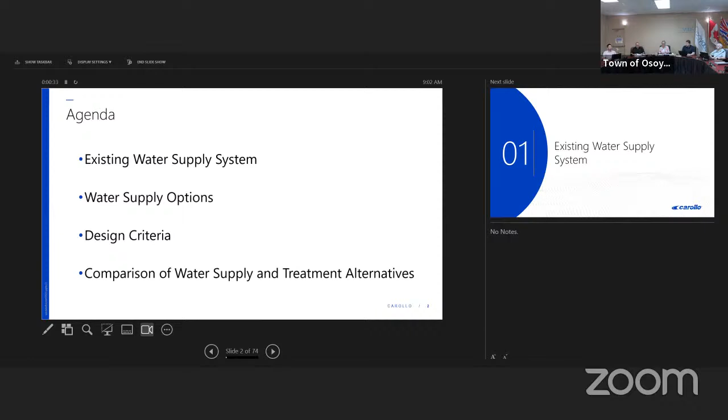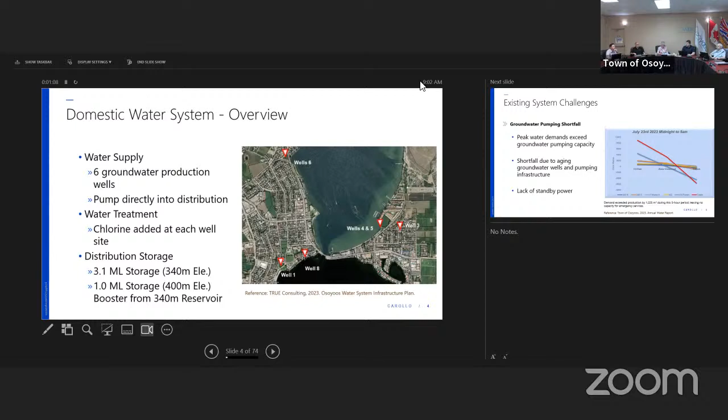So the existing system relies on domestic groundwater wells. There's approximately 6 production wells in service. The groundwater supplies have served the town very well, historically. It's a groundwater supply network with multiple wells pumping into a common network directly into the distribution system. The system relies exclusively on chlorine for treatment, and there are distribution reservoirs on the east-west side of the system to balance peak demands and fire flow.

Some of the challenges encountered with the existing system: on groundwater well pumping capacity, there's a shortfall in peak consumption in relation to the current pumping capacity. Some of that's related to aging infrastructure within the groundwater well systems and limited pumping capacity, as well as a need for additional groundwater extraction points and wells going forward. Another consideration on the pumping shortfall is the lack of standby power within the groundwater pumping system.

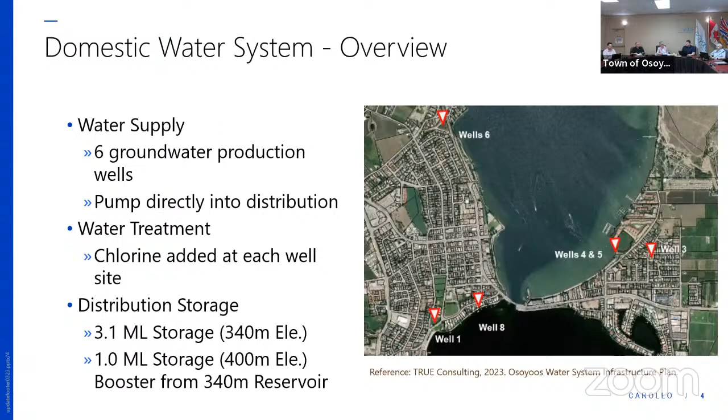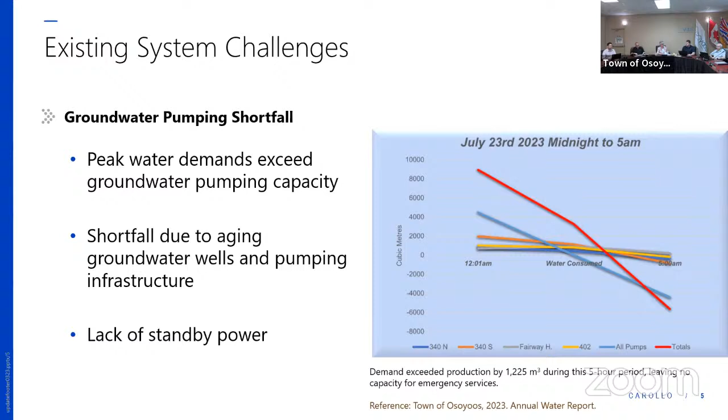I think compounded with the shortfall in the current pumping capacity, just being slightly below the peak consumption rate, which is presently mitigated with reservoir storage, there's also a lack of standby power. So if there were power failures, either locally or more broadly within the system, there could be an incident of not having enough water to meet demand and fill the reservoirs.

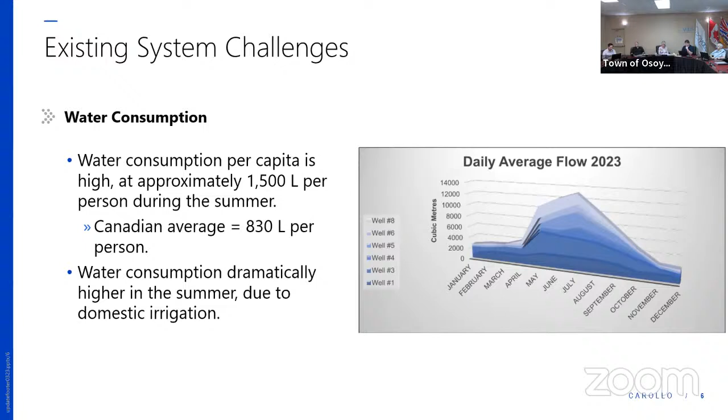Another context within the existing water system challenges, this one's less related to the source and more related to consumption patterns within the community: relatively high per capita consumption. Looking at other communities within the Okanagan, typically seeing anywhere from 500 to 1,000 liters per capita per day on average, with town of Osoyoos being quite a bit higher. That's a consideration continuing to challenge the capacity of the groundwater system you have in place, and that's consistent with other communities within the valley. It's very much driven by domestic irrigation, so seeing a very high swing from seasonal winter demands to peak summer demands, combined with irrigation as well as tourism and hospitality service.

So that's the current situation. Looking forward, if the town were to continue using groundwater as the primary supply source, additional well capacity would be required. Testing wells were developed for well 9 and well 10 previously, and additional wells would be needed to meet the 2050 demand. We looked at 2 different scenarios documented in previous studies with respect to a 2050 design horizon, one with conservation, one without conservation, and a 1% to 3% range of potential population growth. For analysis and planning purposes at this stage, comparing the 2 options, we selected the midpoint growth scenario, and assumed that conservation was not included in that number.

The rationale around that is from a planning and siting perspective, and trying to make big decisions on major infrastructure. Not knowing what you're going to get out of conservation, I think some of the targets that have been proposed may not be achievable over time. So it'd be prudent to consider, from a planning perspective, sizing without conservation, and then be able to stage that back as you look at whichever solution goes forward, having that provision to stage in response to what you're able to achieve through conservation.

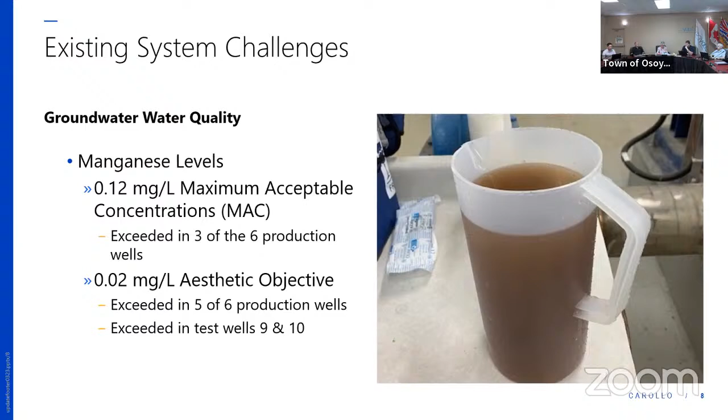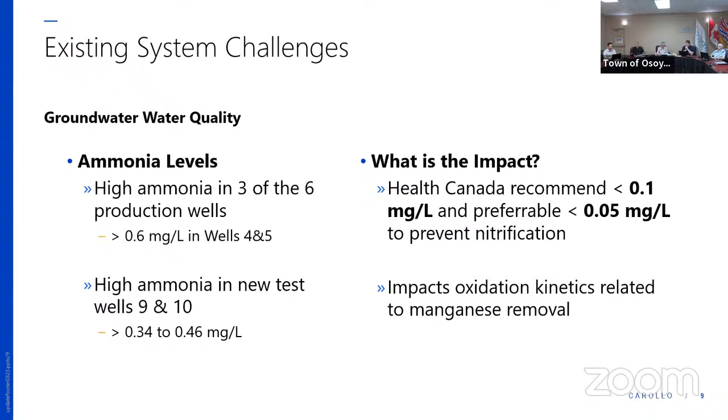For the groundwater supply, there are relatively high levels of organics. The recommended organic level is 4 milligrams per liter total organic carbon. That's largely driven by the potential for disinfection byproduct formation—carcinogenic byproducts that form through the interaction of chlorine and those organic compounds. In wells 1, 3, 4, 5, and 8, that guideline of 4 milligrams per liter is exceeded going in. The town, historically, in operating chlorine disinfection at the different well sites, has had to work fairly closely to manage that chlorine residual in relation to trying to avoid generating high disinfection byproducts. So it introduces a challenge within the disinfection process and potential health considerations around disinfection byproduct formation.

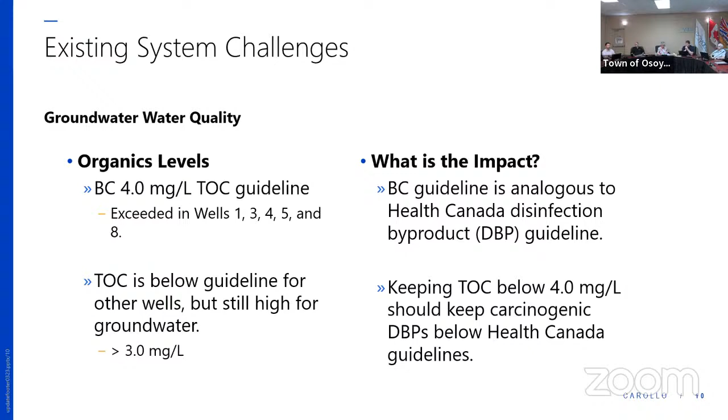Looking at the groundwater wells in relation to these different water quality parameters, it's helpful to see the incidence based on location. Well 1 has relatively low manganese concentration, low ammonia, however high organics content. Well 3 exceeds the manganese aesthetic objectives, is below the ammonia level, but exceeds the total organic carbon levels. Wells 4 and 5 exceed both the manganese maximum acceptable concentration levels, as well as the recommended ammonia level and organic carbon levels. Well 6 exceeds the manganese aesthetic objectives, but is below the ammonia and organic carbon levels. Finally, well 8 exceeds both the manganese maximum acceptable concentrations, the ammonia recommended limits, and total organic carbon levels exceeding 4 milligrams per liter.

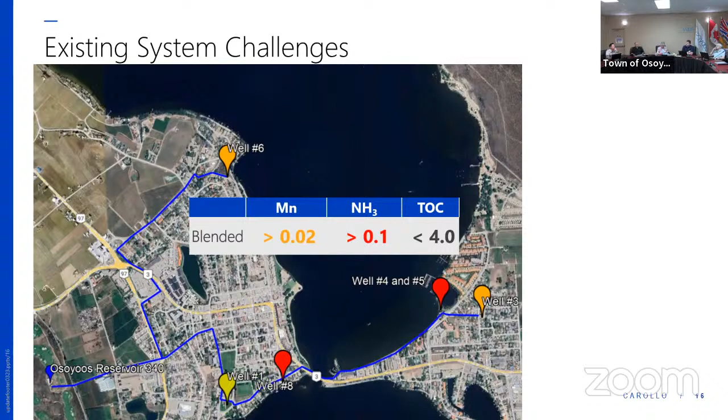So the blended water quality, if we pulled all that together and mixed into a common source supply, the manganese would be between the aesthetic objective and the maximum acceptable concentration. Ammonia levels would exceed the recommended guideline of 0.1 milligram per liter, and your organic carbon would be just below 4.0 milligrams per liter.

Looking at the groundwater supply, another important consideration is the recent groundwater at-risk of containing pathogens criteria, which is relatively new—it replaced the GUDI guidelines. These are effectively an assessment or screening tool to understand the vulnerability of a groundwater well supply to interaction with pathogens, looking at different exposure potential to surface water contaminants and ground-to-surface contaminants. So if you had a standby generator over top of your groundwater well, that would be a potential source of petroleum into the groundwater supply. It also looks at wellhead construction and the potential for surface interaction to infiltrate. Looking at the town's aquifers and speaking with Western Water Associates, there are effectively two aquifers identified, one on the east and one on the south side. They're essentially similar—identified separately, but more or less with the same characteristics. They're shallow aquifers, heavily influenced by surface water, with direct influence from the lake as well as direct influence from surface water activity, so ground filtration from irrigation interacts with your groundwater supply.

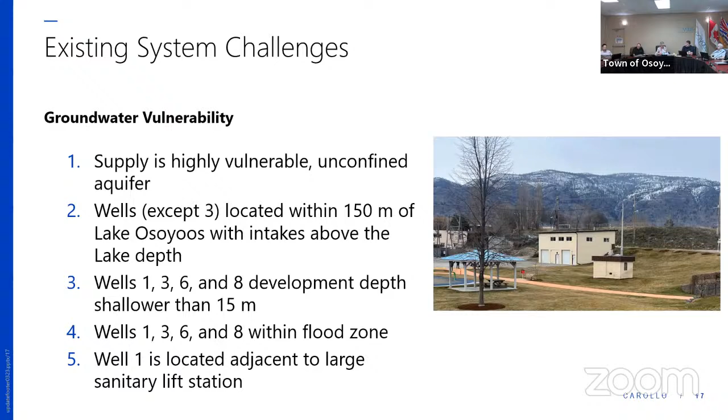So in summary, regardless of whether we continue down the path of using the groundwater supply system, at a minimum, utilization of two forms of disinfection will be required—that would include UV disinfection and chlorination—and that would be required at all well sites, or at a common location that all the wells are supplied into.

So in summary, with your existing system, from a source supply perspective, additional pumping capacity is required to extract more water to meet both current demand as well as future demands.

The aquifer is considered a shallow, unconfined, highly vulnerable aquifer to surface water contaminant interactions. There's also a direct relation - high organics in the groundwater are an indication of that influence and interaction with the surface water source at Osoyoos.

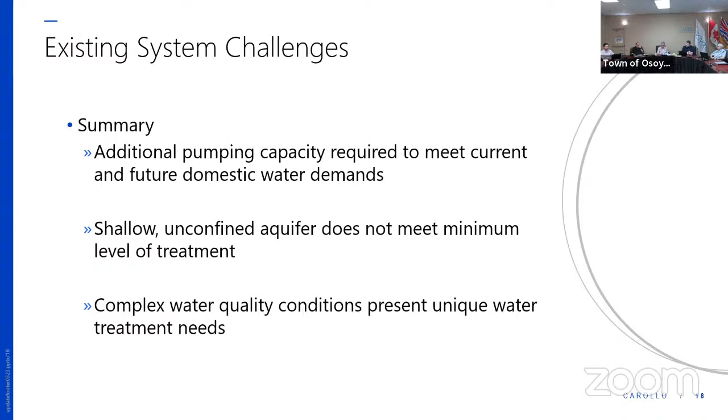And then finally, there are relatively complex water quality conditions for treating the different parameters independently, and we'll get into that a little more when we look at the pilot data that was conducted both in 2017 and more recently in 2023, 2024.

The conclusion: upgrades are required. The drinking water infrastructure needs both expanding supply capacity as well as providing additional levels of treatment to meet both provincial and federal health guidelines.

The town is fortunate to benefit from having access to two relatively good source waters. You have the groundwater source available that has served you well leading up till now, and then availability of a relatively high quality surface water source as well in Osoyoos Lake.

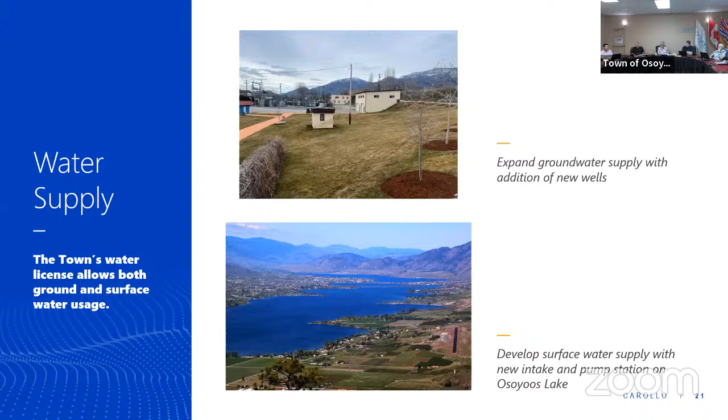And so in looking forward, in consideration of making significant capital planning for the town, it makes sense to decide what is the best source to invest in going forward. That effectively formed the basis of this study, which was to evaluate the feasibility of both supply and treatment considerations for the town, given the challenges with the existing system.

So looking at the groundwater supply, some considerations from the analysis: minimum level of treatment would be two forms of disinfection - typically UV disinfection followed by chlorine disinfection.

Complex inorganics, metal and ammonia concentrations have interaction with the treatment kinetics and chemistry that introduce some challenges that need to be considered. We've also identified...

...perfluorinated substances, PFAS, otherwise known as 'forever chemicals,' have been identified and confirmed within the sample. They have not exceeded current guidelines, but are of note, certainly from the groundwater supply, in that they have a long residence time and often stay around for many years.

On the raw water supply, to meet the 32 megaliter per day planning capacity at the 2050 design target, 5 new wells would be needed to meet that production capacity.

Of the existing wells, many have been serving the town well for many years. As a consequence, they're getting due for refurbishment, to get another 50-60 years out of them and to increase the capacity of the wells to meet demand needs.

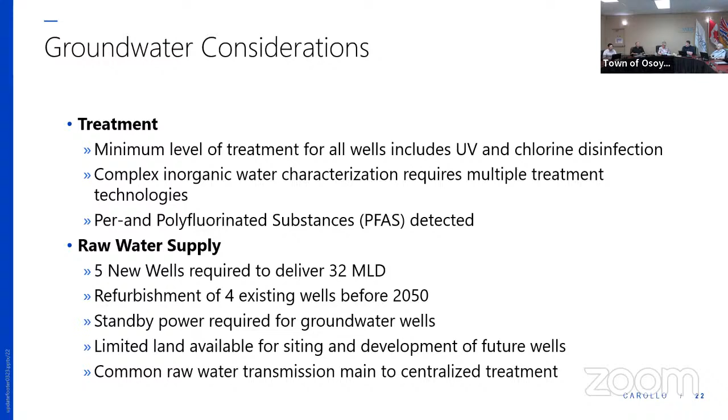Looking at the surface water treatment plant, the lake is characterized as relatively low turbidity, moderate organic level, with seasonal algae events that need to be considered within a treatment selection process.

The surface water is relatively typical and similar to several of the surface water treatment plants throughout the valley. Also of note, PFAS was detected in most recent sampling. The results haven't been confirmed, but are below current guidelines - something to track and keep an eye on.

With raw water supply, for the domestic source, there is no domestic raw water supply infrastructure from the lake, so that would need to be new infrastructure to get water from an acceptable location in Osoyoos Lake into a centralized treatment, similar to groundwater, and then into the distribution system. At a high level, irrigation intake 8 was identified as a suitable location for further investigation or development of that source water supply.

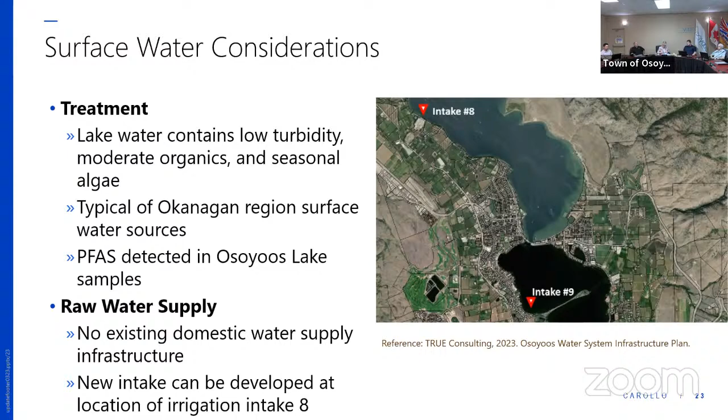So the design criteria, I'll walk through. This sets the framework for the analysis of the two options and considerations that went into development of those options. From a water quality perspective, both options follow through on the 4-3-2-1-0 guidelines, which are both federal and provincial guidelines for protection of pathogens, following a multi-barrier approach.

The differences between the two systems: relevant to groundwater, there's a target for ammonia reduction to manage treatment process stability, manganese reduction, and metals reduction. On the surface water side, consideration to potential algae events and associated cyanotoxins needs to be considered. There's both the cyanotoxin, which is a health consideration, and the geosmin and MIB, which are related to taste and odor events that trace back to algae.

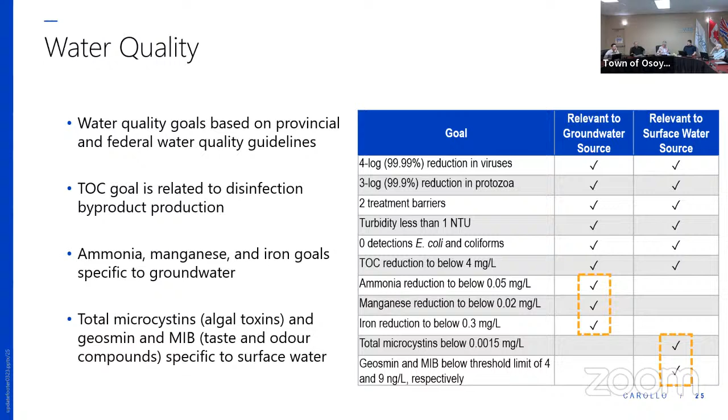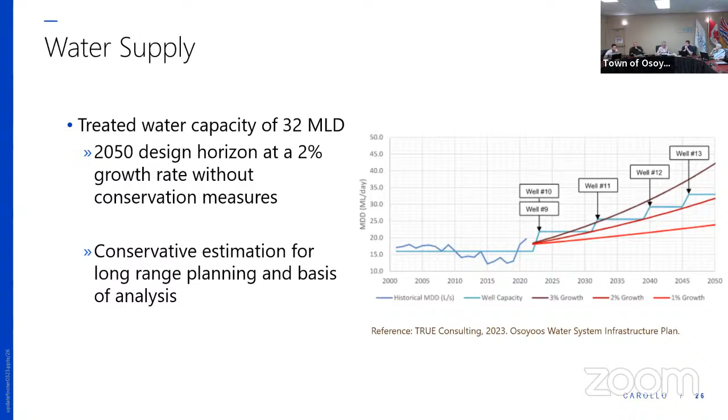As far as water supply, as mentioned previously, for the basis of planning comparison of the two options, we selected the 2050 design horizon and 32 megaliters per day of treated water. That assumes anything gained out of conservation measures will be a benefit. So from a planning perspective and looking at further development of the source water supplies, selecting that 32 megaliters per day is a reasonable and conservative assumption for planning purposes.

As far as equipment configuration, this drives some of the decision making on the layout and orientation of the process infrastructure within the proposed treatment and raw water supply components. As per the current BC Building Code, water infrastructure is to be built to post-disaster requirements, which introduces more complexity in the structural design and construction of the facilities to handle seismic events. Targeting zero boil water notices due to treatment upsets establishes a certain level of redundancy within the process design to accommodate intermittent upsets, and then continuous supply of potable water.

So treatment train - multiple treatment trains, having the ability for residual treatment not to impact the production of treated water. And similarly across all systems, having standby power both right from source water through to treatment plant, so that in the event of fires or other potential events that can impact your power supply, you're still able to produce water and get it into the system.

From a siting perspective for a new facility, it's important to plan for potential changes in your demand and potential changes in your water quality. Selecting a site that can accommodate different future considerations is recommended at this stage. That informed our approach to identifying a proposed site for that centralized treatment.

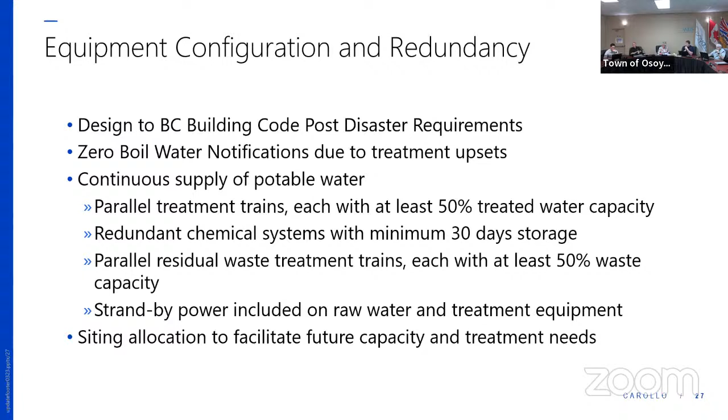Within that, we identified biofiltration, which is a common tool used for manganese removal, catalytic manganese removal, which speaks more to proprietary media technology - so manganese greensand, greensand plus manganese dioxide, and other types of proprietary media that target those metal removals. And then organic absorption, looking again to reduce organics levels as well as potentially deal with PFAS. And then, as mentioned, the base of two stages of disinfection following the treatment.

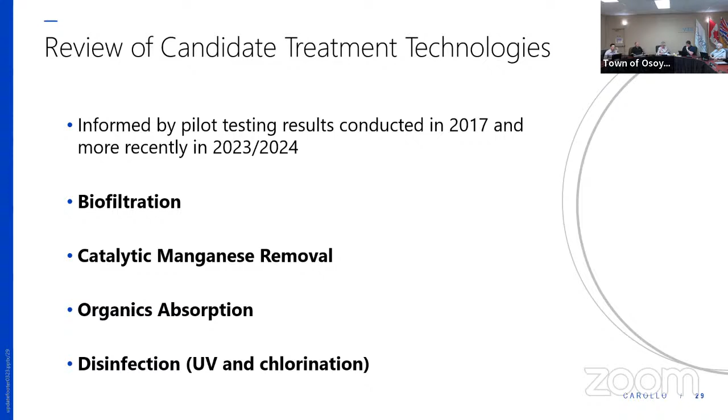Looking at the results of the pilot testing - I understand you've received a more detailed presentation on this, so we'll just highlight the considerations that informed selection of the treatment process for the groundwater supply in this feasibility assessment. They looked at three different treatment types: greensand and Filox, which are effectively the catalytic manganese removal, biofiltration, as well as ion exchange. Each technology was able to treat one of the parameters encountered within the groundwater supply, but none of them were able to deal with all of them at the same time - so there wasn't a silver bullet within the quiver from the pilot testing results.

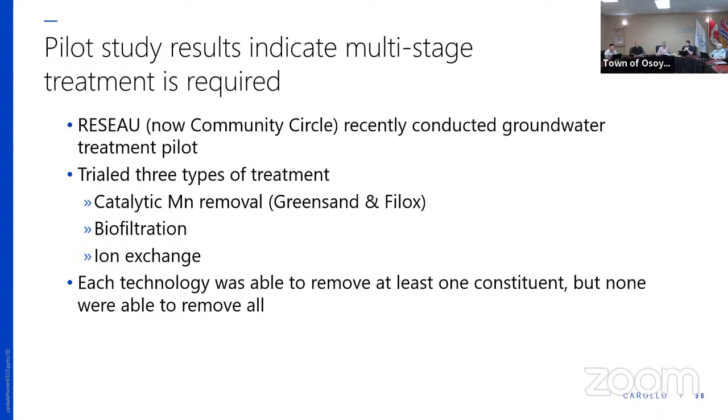Looking at the ammonia removal, it's probably harder to see, but the light green and murky green dots show the green sand treatment train, which would be coupled with chlorine addition. Early in the piloting, you see a reduction below the target for ammonia with the green sand, a lot of that driven by the chlorine addition, and then it starts to veer off and rise back up over the course of piloting.

Looking at the manganese levels, the green sand was able to remove manganese early on for about half the piloting period, but then started to climb up again, showing some breakthrough and sloughing of manganese as it continues to operate. Again, this presents some concerns with the stability of manganese removal from that technology.

Looking at ion exchange, it was really the only technology able to effectively reduce the organics consistently below 4 milligrams per liter. Turbidity, which is less of a target and more of an indicator of particulate removal and protection from pathogens, showed effective removal in both the biofilter and the green sand and Filox treatment technologies.

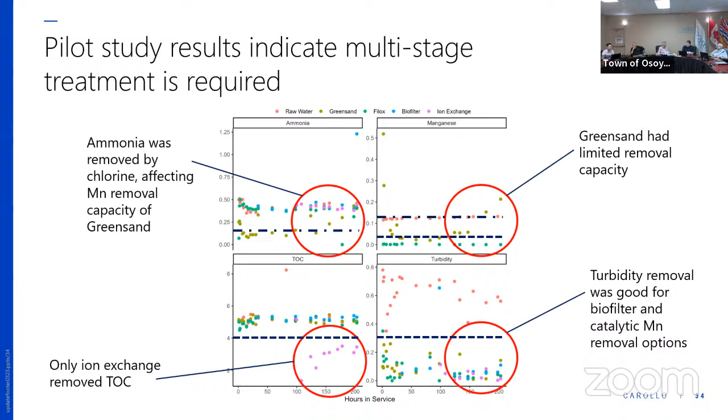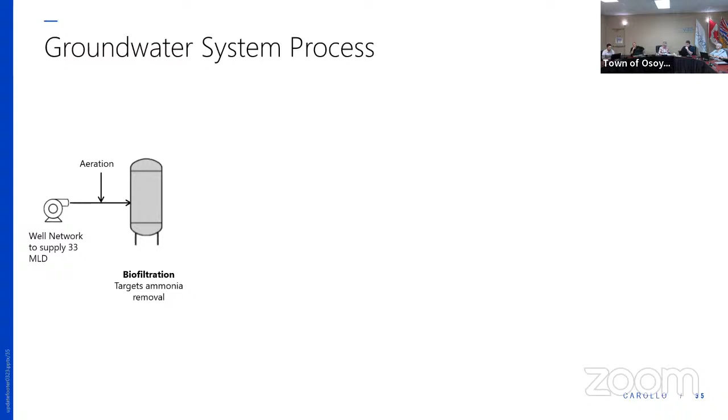Based on analysis of the piloting data, as well as industry practice and what you can reasonably achieve through these different technologies, we identified that biofiltration for removal of ammonia should be able to effectively remove it, with the addition of aeration to improve the health of the biological activity on the filter media. It will have some benefit to organics reduction as well as manganese removal, but maybe not consistent or stable enough to be relied on its own.

So we propose following the biofiltration with a manganese dioxide contactor, which would then effectively polish or scrub any potential manganese that makes it through the biofilter. It would be caught by the manganese dioxide filter and removed, effectively preventing any dark water events or seasonal breakthroughs.

The other thing that came from the piloting data was an indication of the stability of the biofilter to maintain treatment efficacy through ranges of flow variations. When you have a seasonal flow like the town has, biological filters stabilize over the course of days, sometimes 30 days, so ramping up and down can be challenging for them. Again, the manganese dioxide contactor helps catch some of that breakthrough that occurs through stabilization of the biofilter.

We identified optionally a GAC, or granular activated carbon media, that would effectively remove any organics present in the system and reduce disinfection byproduct formation, but also focus on potential other contaminants like PFAS, which is becoming more of a consideration and concern. And then, as mentioned previously, the inline UV reactor followed by chlorine disinfection.

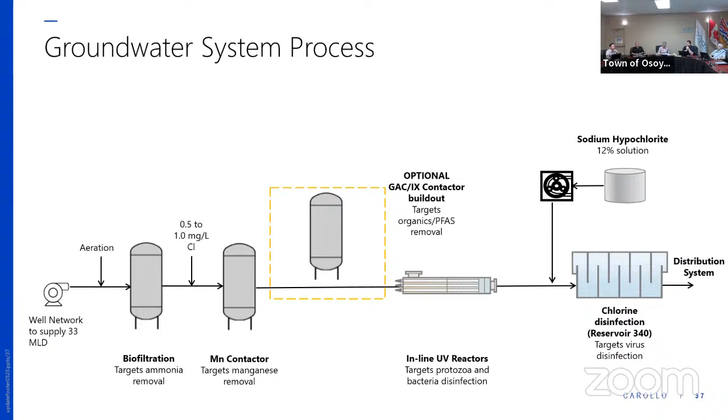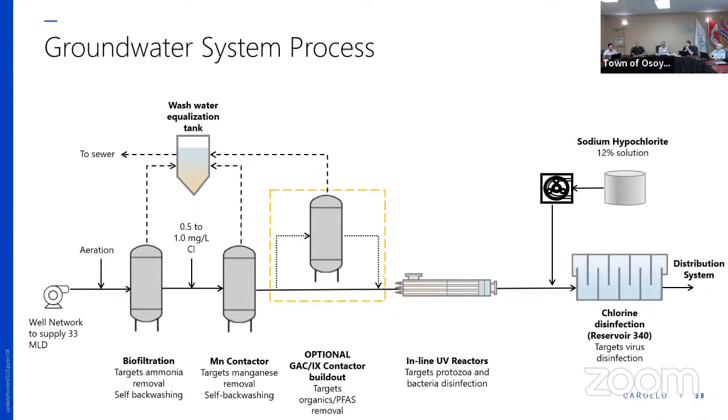On the final treatment consideration for the groundwater supply, wash water equalization is relatively easy to manage in the sense that these biofilters or pressure filters will backwash automatically, for short duration, a few times a day to maintain the health of the filter. That's equalized in a tank and then can be discharged directly to sewer. There's a hydraulic impact to the capacity of the wastewater collection and treatment system, but from a quality perspective, we didn't identify any parameters of concern going into the waste stream.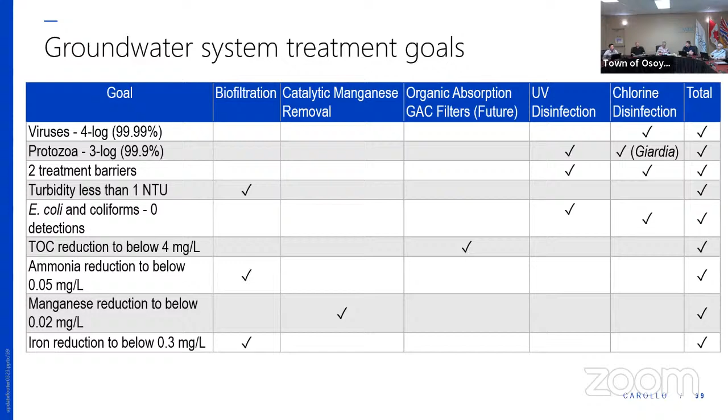Just a summary slide showing the ability of this treatment train to meet all of the targets, pathogen guidelines and treatment objectives, and which technology aligns with which parameter.

Just a brief comparison to previous considerations on groundwater supply planning. The basis of design was approximately 20 megalitres per day, so we're looking at 50% higher capacity for planning purposes, and I think it was supposed to focus on manganese removal. It looked at aeration and the biofilter, which the pilot testing more recently showed challenges with being able to get that stability. So the expectations of this treatment train, based on the piloting data, would see incidents of manganese breakthrough, and the challenges around ammonia and manganese removal hadn't been fully developed or considered within this treatment approach. It also didn't consider the two stages of disinfection.

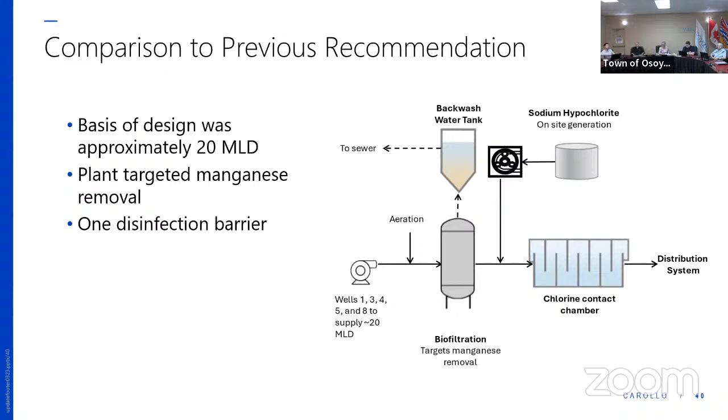So again, proposed groundwater plant layout, approximately 1,600 square meter footprint. These are conceptual level layouts, with lots of opportunity to refine and configure this going forward, but we wanted to develop general footprints for comparative purposes.

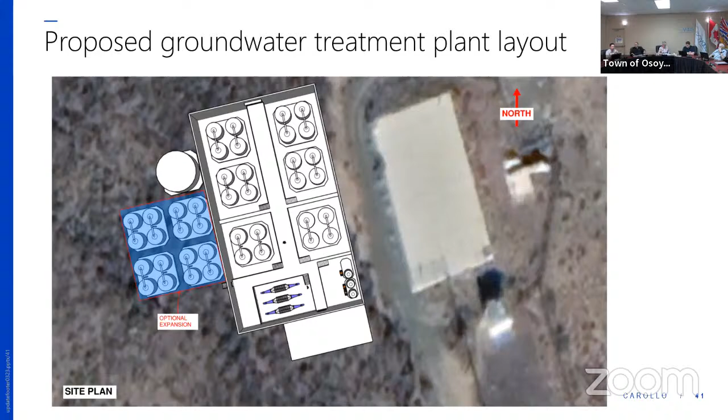Just to speak to some of the previous considerations on siting, it's worth noting the original site on the east side of the lake, adjacent to well 3-4, between wells 3, 4, and 5. We reviewed that as a potential site, but based on available land there wasn't sufficient space to accommodate the anticipated treatment requirements. We also want to be careful investing in a centralized treatment facility to have room to accommodate different capacity and treatment challenges that could come up in the future, given the significance of the capital investment.

The benefit of this site is that it's closer to some of the wells, so you'd have shorter transmission main requirements associated with it. That reduced transmission main requirement would likely have informed some of the previous assumptions on costing, as well as the treatment train. Having only one of the proposed treatment components included would have also affected the plant costs.

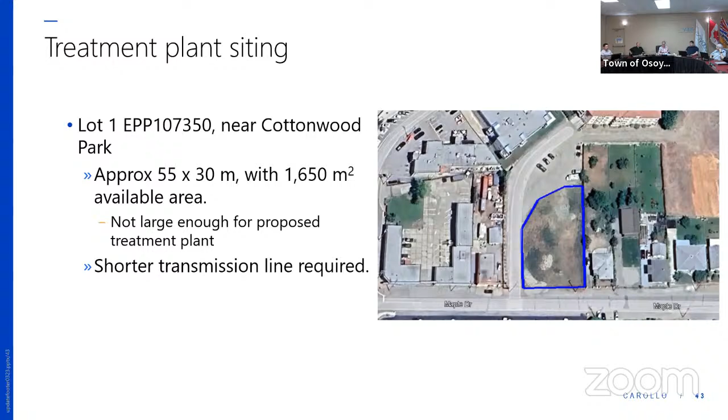Looking at the sites available, we focused on land owned by the town in some capacity that could be reasonably utilized to accommodate a centralized facility for future treatment. We identified the golf course in discussions with town staff as a reasonable, central location. There's already existing water infrastructure there with your main reservoirs, and sufficient space to expand and accommodate the potential needs of a future treatment facility.

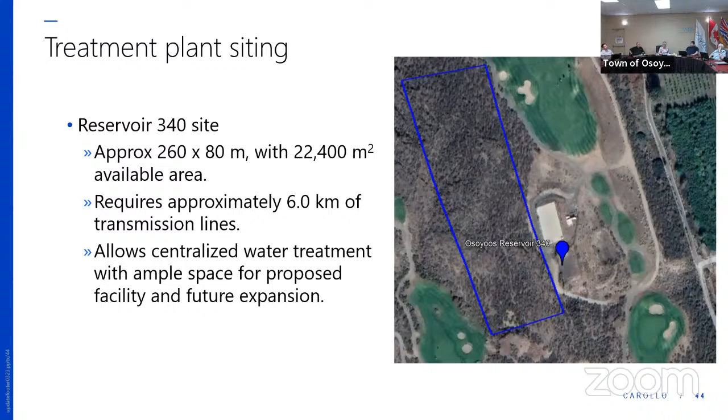Looking at the groundwater conveyance network, tying each of those wells into a common system, the intention would be to collect all of the raw water from each well into a common groundwater conveyance pipe, and then direct that to a centralized treatment facility where it can be treated, discharged into the reservoir, and gravity supplied out into the distribution system with the existing distribution infrastructure.

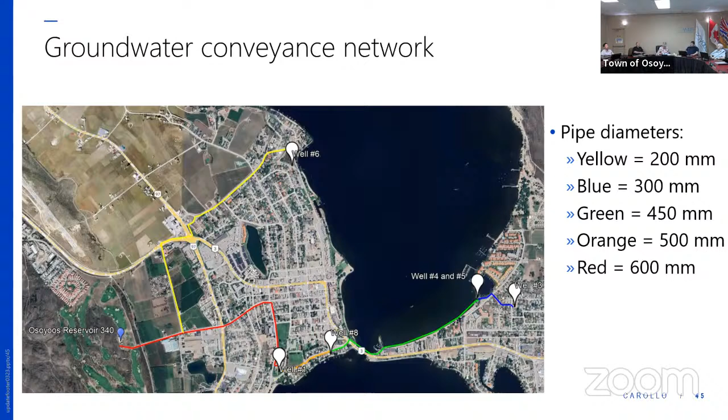Some considerations on the groundwater conveyance network: the majority of those pipelines are going to be in the town, so more of an urban impact, urban corridor and disruption within the town, based on the location of the wells presently.

Some consideration to planning of those future five wells would need to be factored into that pipeline design, and there's some variability or uncertainty in where those wells will be tying in. So you would likely want to oversize a backbone of that groundwater supply network to be flexible for different locations of the new wells.

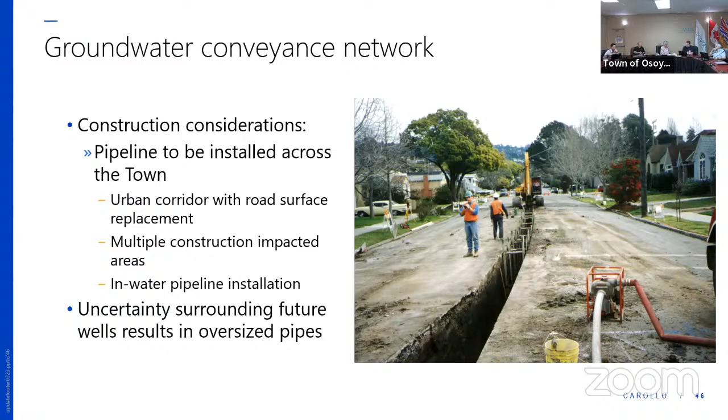Based on the analysis and cost estimate developed for that option, we estimated a capital cost of $61 million, with a class 4 estimate, so the range is -30 plus 50. That accommodates the level of knowledge available at this time in the study. Further geotechnical investigations, changes in site locations, and other factors yet to be decided could influence that cost within the range of 43 million to 92 million.

Looking at the operational costs, largely driven by the raw water pumping costs associated with getting that groundwater into a common supply network and up to a centralized treatment location, plus equipment replacement costs and labor associated with running the new facility.

Looking at the surface water treatment option, informed by the development and selection of the treatment technology and train to support a surface water treatment plant off of Osoyoos Lake. Clarification would be required since direct filtration wouldn't be feasible given the potential for algae within the system. Algae have a tendency to get on top of a filter and blind it off, so you need a treatment process ahead of filtration to remove organics and the potential for algae, so your filter can behave properly and work reliably.

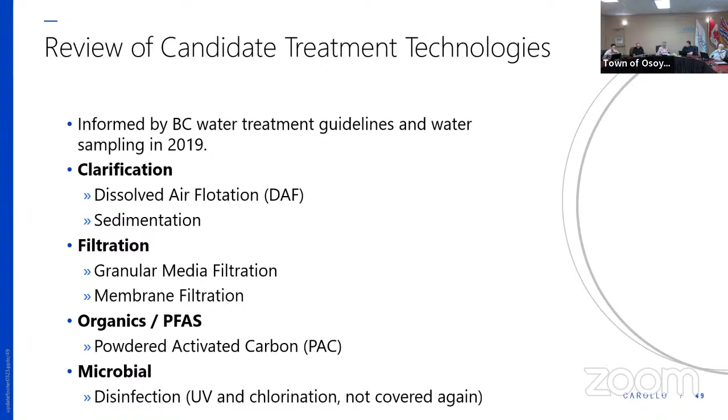So looking at surface water treatment plants, the focus here is reasonably conventional, and it's a multi-barrier approach. So you're looking for multiple treatment processes to provide a holistic protection. So if any one of them fails, similar to the groundwater side, you have another barrier to interact and catch potential breakthrough or limitations of one barrier.

As I mentioned previously, direct filtration wouldn't be possible due to the organics and algae concentrations. I think a point of note is that there's less comprehensive water quality sampling data available for the lake. However, the data that has been presented or provided to us to date is consistent with the other surface water sources up the Okanagan Valley chain.

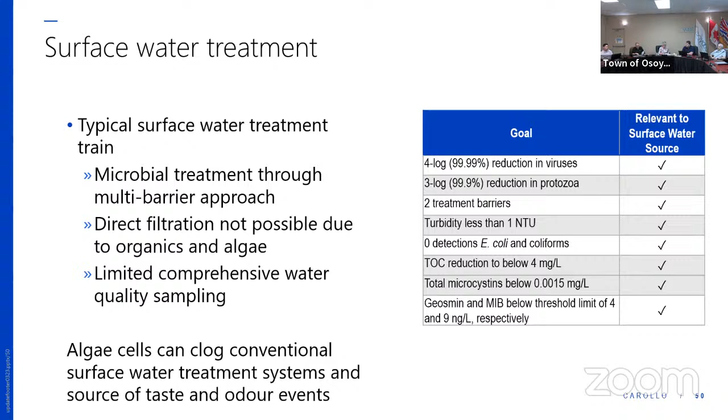So looking at the treatment process train, starting with the dissolved air flotation clarification process—that's the same technology implemented in the District of Peachland. District of Summerland has something a little bit similar but different, but achieves the same end. Rose Valley's recent water treatment plant utilizes this technology, as well as the City of Vernon.

Must be another one, but it's very common in the Okanagan for surface water sources with relatively high organics, light organic content that needs to be removed, and low turbidity sources.

As I mentioned, you would have the provision to add powder activated carbon for enhanced taste and odor reduction. If you had an algae event and you had geosmin and MIB released, you can use powder activated carbon at the front end of the DAF process to remove that, or for an organic or other event that required intermittent management.

So following the DAF clarification, the clean water flows down, dirty water flows up. So the clean water would flow out the bottom of that process and then onto granular media filters.

I remember the other treatment plant that uses that—there's two plants in West Kelowna that use that, both the Rose Valley and the Powers Creek plant. The granular media filtration process would follow the dissolved air flotation. Granular media effectively removes particulates and pathogens that can be present in the incoming raw water.

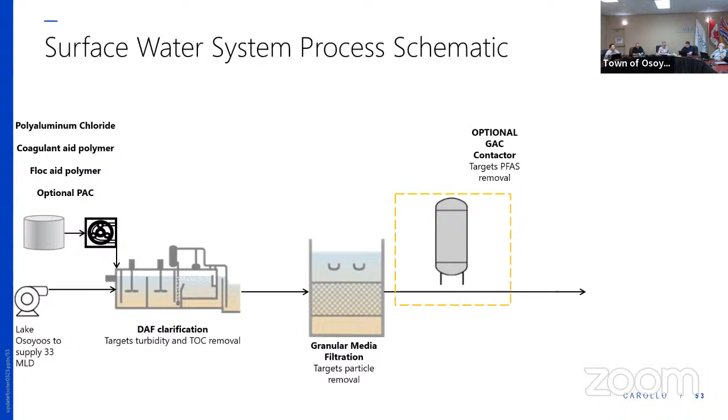Similar to the groundwater, I think consideration or planning for the provision of a GAC—granular activated carbon—pressure vessel or gravity basin. The consideration there is that if PFAS or other contaminants of concern become a problem, you have the ability to respond and address those in the future.

And then similarly, the UV followed by chlorine disinfection. So the main differences between the two processes are really the clarification process and granular media filters in relation to the pressure vessels. The DAF clarification and granular media filtration are focused on organics reduction as well as microbial treatment—very conventional treatment processes—whereas the groundwater system is focusing on the inorganic parameters present in the water, trying to get the metals and ammonia reduced.

On the surface water treatment plant, one of the more complex components is the consideration for wash water treatment. So a separate process would be in place to treat the waste from backwashing of the granular media filters, as well as what they call the float or sludge that's scraped off the top of the dissolved air flotation process. So that all goes into a common process.

The liquid stream would be treated and then recycled back to the plant, giving a high recovery rate or high efficiency through the plant and reduced water waste. But then the solids content of that would then be dewatered and/or directly to the sewer, depending on the provision for dewatering and reducing that into an organic cake material, which is often used for either landfill mixing in for organics or ground application, depending on the metals level within the material.

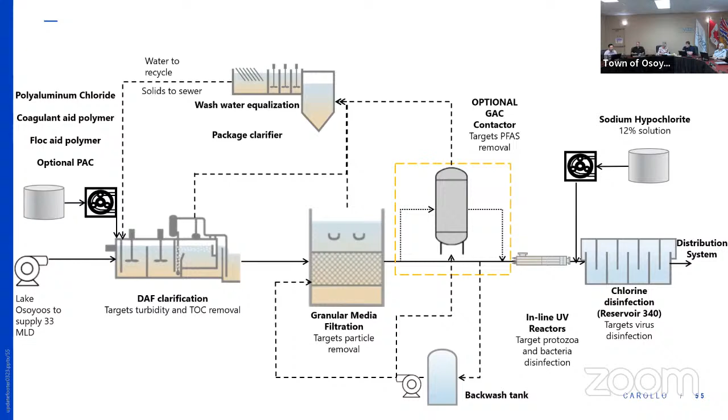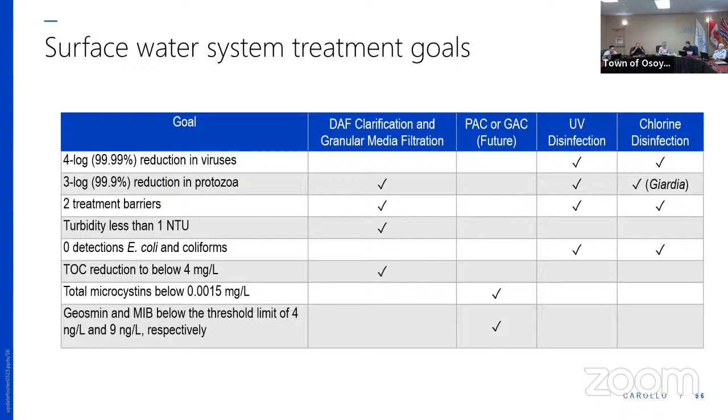Again, just a summary of the different technologies and which objectives they achieve. You'll see with the surface water treatment process there's a little bit more doubling up, where you have more barriers doing parts of similar objectives.

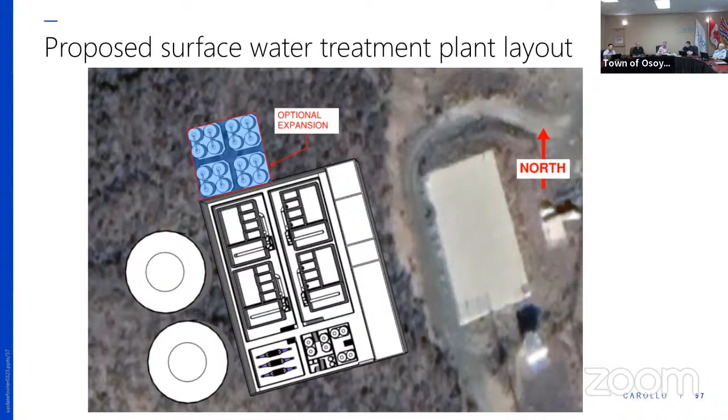Looking at the proposed surface water treatment plant layout, the size is a little bit larger than the groundwater treatment plant. The groundwater was estimated at 1,600 square meters of footprint, and the surface water is estimated at 1,900. That's expected based on the configuration of the processes. Again, similarly, there's provision to expand or accommodate GAC in the future if and when needed.

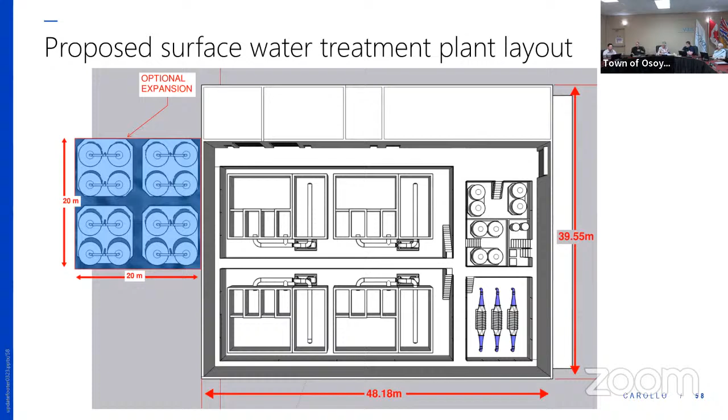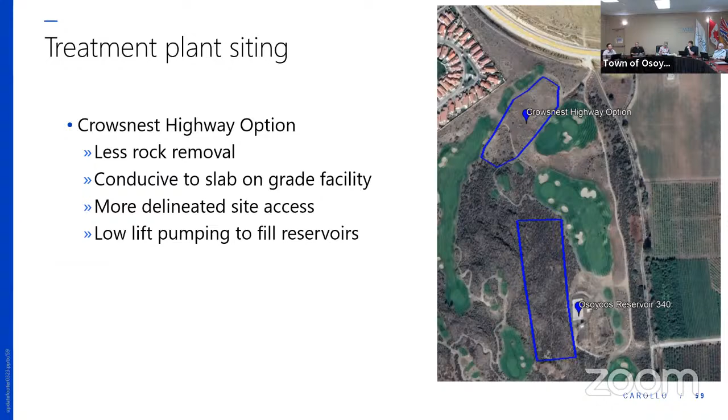One consideration for the surface water source development is the need for new pumping intake infrastructure. Analysis of the Osoyoos Lake water quality identified 30-meter depth as the optimum, consistent with the thermocline throughout the valley and other surface water intakes. That protects you from turnover events that happen seasonally with temperature changes, and the algae depth is ideal for getting optimum water quality. That puts the intake at about 240 meters off the shoreline.

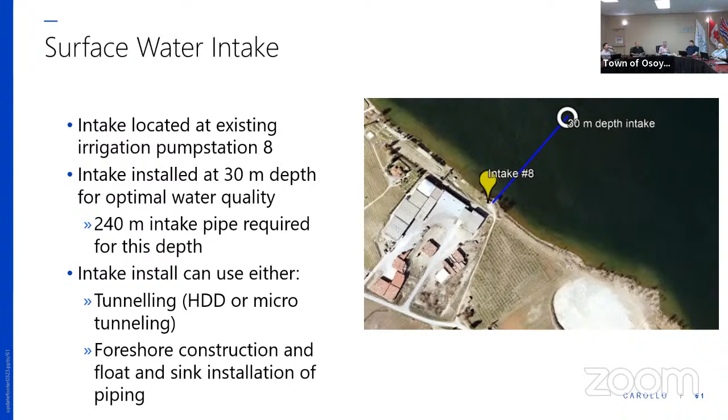So a new intake pump station will be required to accommodate that. This is just to give context of what that could look like. Constructing adjacent to the shoreline, you want sheet piling installed, and then you can either drill out into the water or open cut, shown on the right hand side, and drop the pipe in. The point of this information is just to show there will be considerations in working in water that need to be accommodated as part of construction of the new intake.

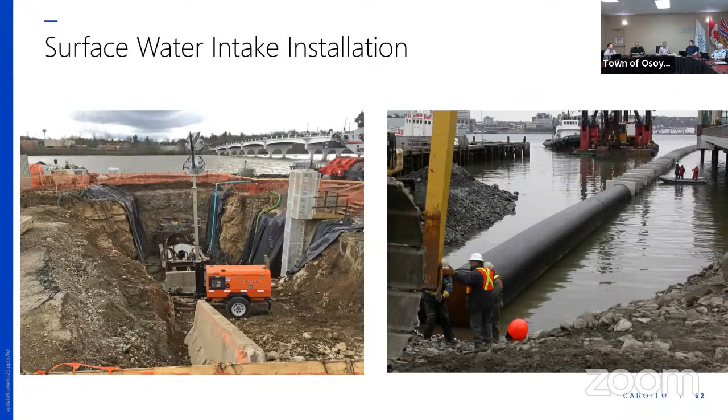We identified a raw water transmission main route. I understand there's an existing supply from intake 8, but it would be undersized for future domestic drinking water supply needs, so a new dedicated pipeline up to the proposed reservoir treatment site is suggested. As you can see, there are a couple of highway crossings, but for the most part the alignment of the proposed pipeline is more rural than the groundwater option.

Touched on all these points previously. So getting to the expected capital costs, we estimated $51 million, with similar consideration on that cost estimate spread. The expected operational cost is about $1.1 million. The operational cost between the two options is very comparable based on the level of estimate.

So in summary, comparing the different options, we broke it down into a couple of categories to compare the value and consideration of the two supply and treatment options. From a groundwater perspective, source water availability has been able to meet the historic needs of the town to date. However, more reinvestment in supply capacity will be needed going forward, and additional studies will be required to properly site and confirm the best location to extract that additional capacity. You would also be limited to a single source of groundwater, continuing to invest in that source as your primary water supply.

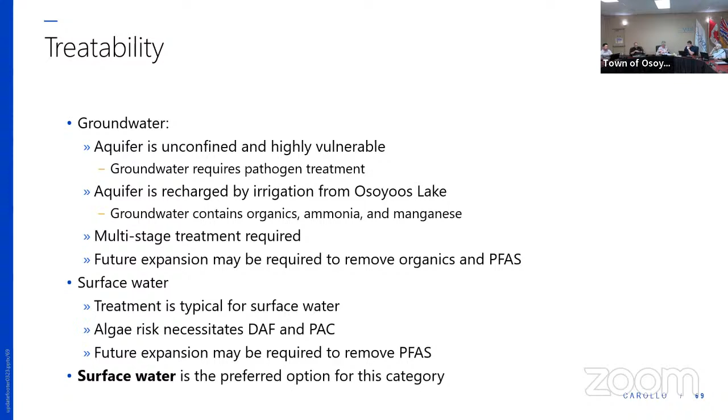In operations and maintenance, the groundwater system running pressure filters will for the most part run in an automated manner, backwashing on a time cycle basis. Given the redundant train configuration with the biofilter followed by manganese dioxide, this is expected to be a fairly robust and reliable process train to treat the parameters present. There will be some management of the biofilter needed to keep its health, which would probably be the focus of operational intervention and support.

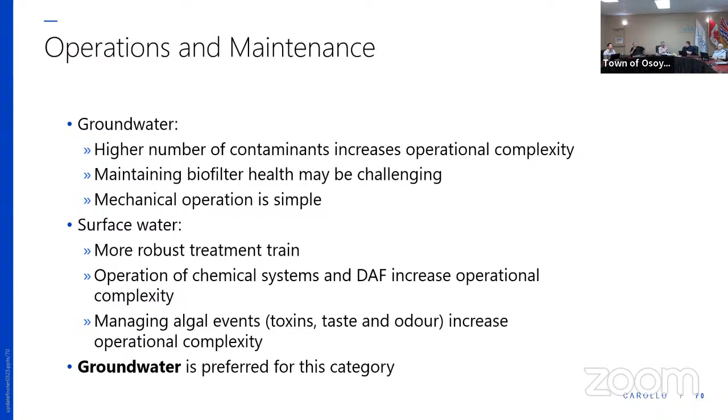On the surface water side, there is more complexity in getting the coagulation chemistry right for the dissolved air flotation process to work effectively and subsequently for the filters to work. So you have a few more dials to operate on the surface water treatment plant, but with those additional dials you're able to do more—it's more robust, and you'd have a little more control of what you receive coming down the source. But it is a bit more complex, and for that reason we noted that groundwater is less complex and may be favored from an operations and maintenance perspective.

Finally, summarizing the groundwater versus surface water capital costs: there's about a $10 million savings in the surface water treatment costs, and a slightly lower operational cost associated with the surface water plant. Therefore it's recommended from a lower capital and overall cost consideration.

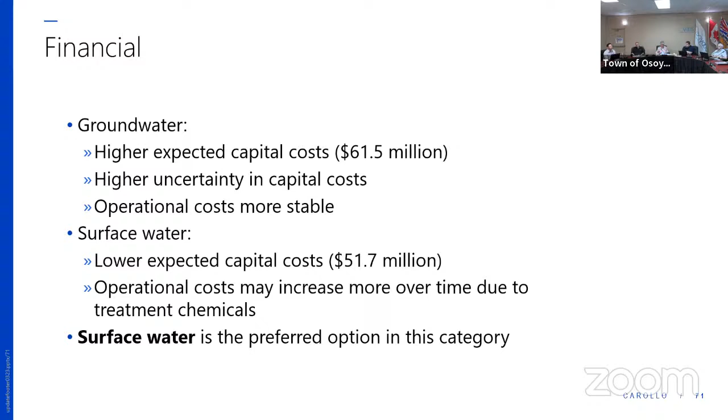In order to benchmark or validate some of the costing information, we thought it would be prudent to look at other plants of similar scope and scale, especially in consideration of what we've seen working with other utilities—waiting has not been a pathway to saving on capital infrastructure. Looking at escalation over the last few years, we've seen prices increase dramatically. In 2019 and 2020 we have plant numbers that would have been earlier in the escalation phase, and we used those to benchmark.

We also have groundwater plants to benchmark in the US and the Pacific Northwest. Effectively, the conclusion from comparative analysis of other cost-per-megaliter facilities in the region is that we're seeing a range of approximately $1.4 million per megaliter. The suggested midpoint of the proposed treatment here is $1.2 million per megaliter, with a range of 0.8 to 1.7. So from our perspective, it's landing within a reasonable range as far as cost per megaliter of comparable plants in the region and what we're seeing in the construction and capital delivery market to date, recognizing inflationary factors of about 1.3.

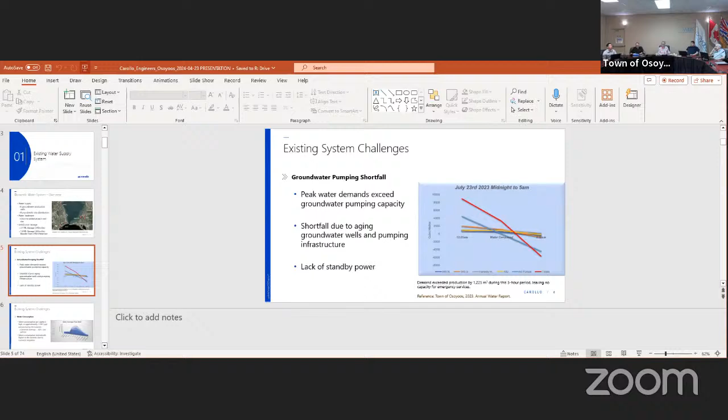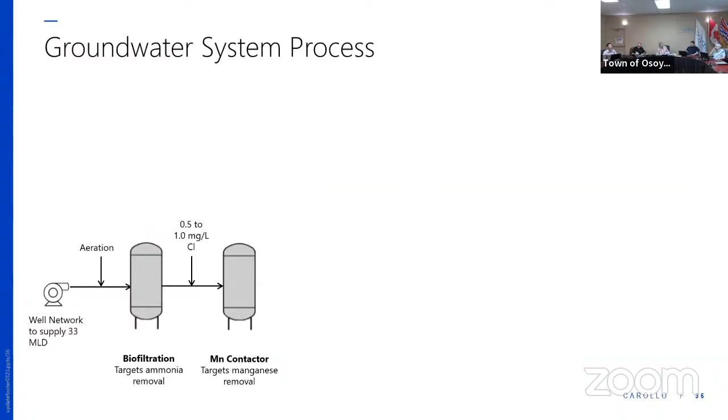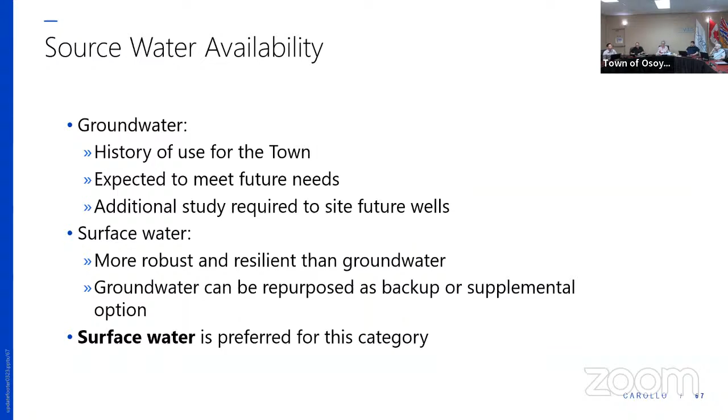To today's dollars, so why would we be 20 cents cheaper than them? So we presented the numbers such that we showed our buildup number, which relates to that 1.2, which ties to the 51 million. However, based on the level of the estimate, that range is 36 to 77, so we show a range of 0.8 to 1.7. No, I would expect you just cut it in half and come up with 1.21, but I'm comparing to 1.45 at today's cost.

Are they comparable sized plants? I guess would be a better question. Yeah, so Peachland is... the Peachland facility is 25 megaliters per day. Osoyoos is being proposed at 33 megaliters per day at present, so Peachland would be a little bit smaller. So maybe a slight premium in cost associated with that, but for my understanding, the way we presented the numbers, the 1.2 and 1.4 are comparable at this level of the cost estimate.

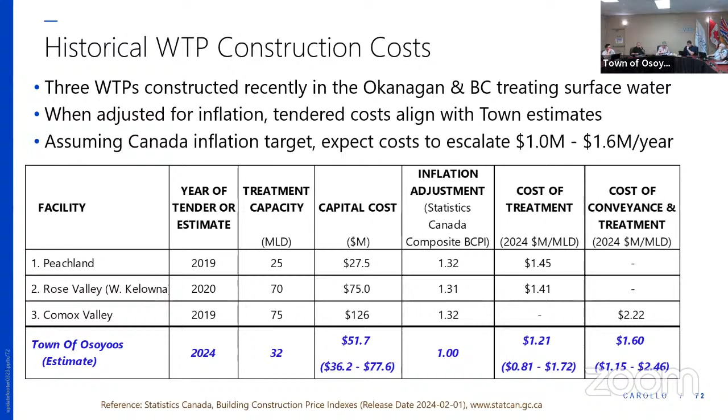At this level of the analysis, we didn't get into a lot of detail comparing the different conveyance options. We picked an alignment that we thought had the least or limited impact, lowest cost impact, and tried to move forward with that. But I think there's absolutely an opportunity to optimize how best to get from the proposed intake location to the proposed centralized treatment facility.

One more: my assumption, if the lake water is not as hard, does that mean people who have water softeners in their homes, which most people do, and the hardware stores sell a lot of salt for, which has other concerns, would that mean that wouldn't be necessary then? Correct. Oh, that's a good point. Thank you.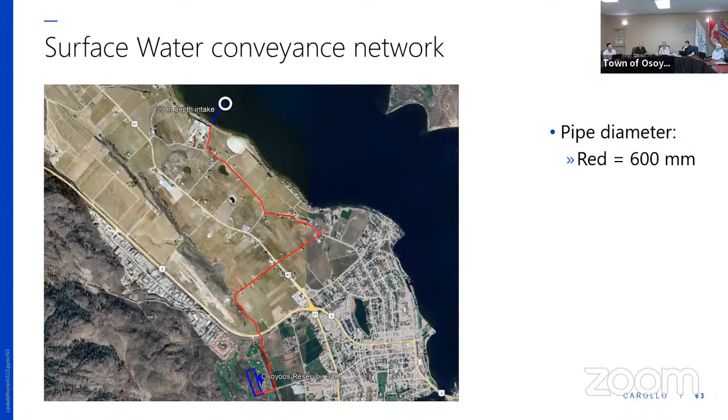The uncertainty is still there because we haven't had the opportunity to define the scope to the point where construction costs are better realized. Yeah, just one more comment.

So if we don't do it and we stay with wells, then basically we're probably going to spend 52 million anyway, because we're going to have to redo those wells. We don't have a choice. So to go groundwater, it's a minimum of 61 million. So you're spending $10 million more just on the treatment aspect. That does not take into account well rehabilitation, it does not take into account standby generators. That is strictly to provide you with a groundwater treatment plant and transmission mains to that groundwater treatment plant.

This doesn't address the other things, and the budget would have to be reconsidered to reflect refurbishing those wells at $1 million a pop. The budget would also have to reflect standby generation in all our wells. I'm spitballing here, but once well 9 and 10 or 10 and 11 come online, you're looking at $8 million for the refurb, plus another $1 to $1.2 million for each new well brought online. Gensets will bring in $150,000 to $200,000 a site, so costs will continue to go up as you continue down the path of groundwater.

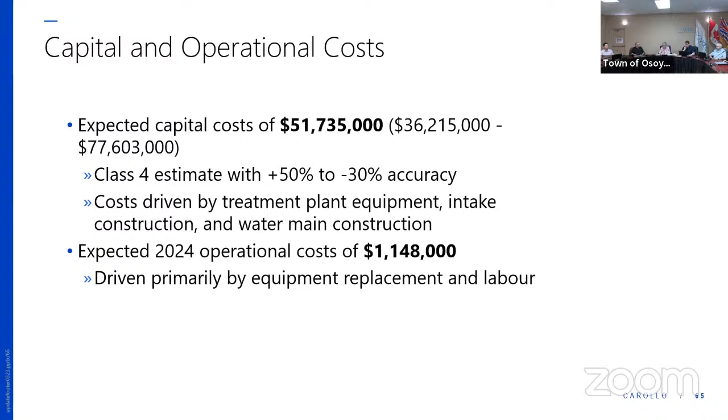So I just want to thank you again, thank you both very much for presenting this and giving us a lot of things to think about. Certainly we're going to have to make a decision. Considering the fact that we have a lot of homes wanting to be built and that the government is requiring that we build more homes, I think it's definitely important for us to look at ways we can make that happen efficiently, carefully and safely for our town. And obviously having a good supply of water is important to allowing a lot more homes to be built here. So thank you, go ahead Councillor.

With that said, I'd like to move option 2, which is to move to a surface water system and construct a surface water treatment facility. Thank you, it's been seconded by Councillor King. So the motion that is right there, including the whole motion - oh, just option 2, okay, that would be on the first page here including the financial plan - just the motion, all right, that's right here: move to a surface water system and construct a surface water treatment facility. Just that part we're voting on.